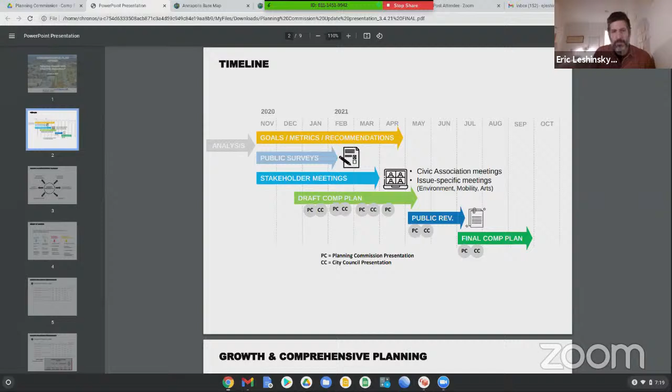But I'm happy with the progress so far. We've met with you all a few times now to talk about our approach to land use. A lot of that is in anticipation of growth — we're trying to be proactive in how we leverage our land in the city.

The growth projection is something that is pretty critical to the comprehensive plan. It is impacting a number of other pieces of the comprehensive plan — just trying to summarize those here. I think one of the most important ones is community facilities. It's obviously a hot topic in the city right now with our adequate public facilities ordinance being updated. We need to make sure that we have the resources to accommodate growth, and thinking about where growth should happen in the city is part of the comprehensive plan, to be sure, and that's something we're going to be expanding on.

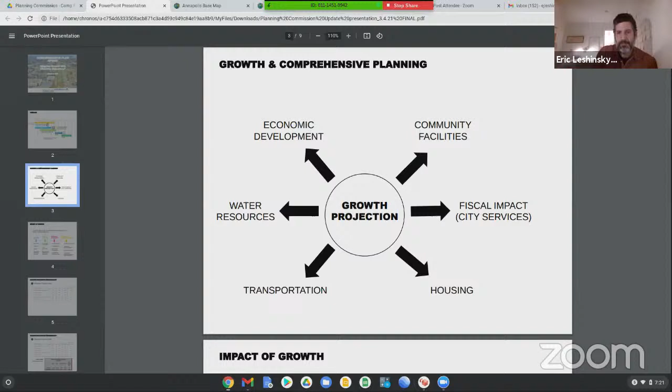There are a number of benefits that we could be anticipating with growth of new households in the city — trying to summarize that briefly. A lot of this should be straightforward, but it's important to recognize that there will be growth; there are developable parcels throughout the city that will change. As a city, with our comprehensive plan, we're trying to be proactive about what kind of growth we'd like to see and what benefits we're looking for. So we're trying to align our growth projection with the vision for the city that we put forward in the comprehensive plan. I'm going to hand things over to Chris Jakubiak in a moment.

Chris, do you want me to stay on this slide, or should I go ahead into the methodology? Let's go to the next slide. I'll just give you a heads up when we can switch. And in deference to the tight schedule, I will move fast, and I guess we can anticipate if you have any questions or comments, you can get back to us.

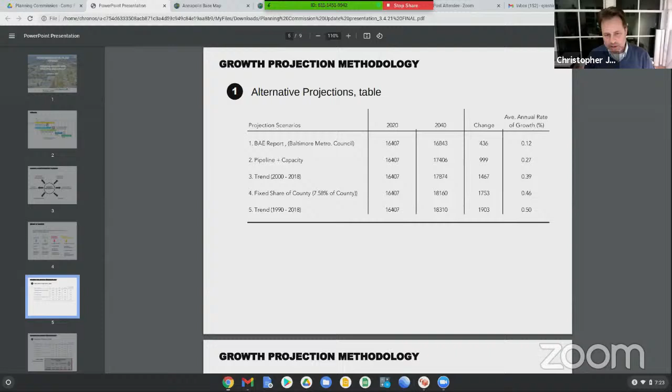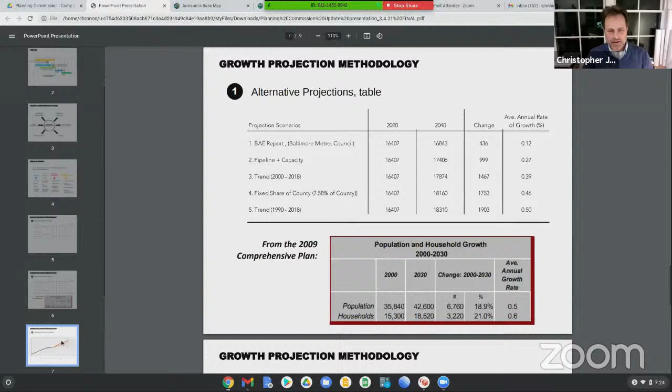Next. And I would just remind folks that the BAE report we're talking about is the fiscal impact analysis that our other consultant BAE produced in the past year, and it was kind of agnostic in thinking about how we want to grow. It used the Baltimore Metropolitan Council's projections, but just basically assumed everything else to stay the same.

Let's see. And this slide, there are a lot of things going on here, but the important thing is to look at what the city's population is relative to the county, because that share analysis, that percentage share, is often the most effective way of predicting the future at a small town or small city, regional kind of projection.

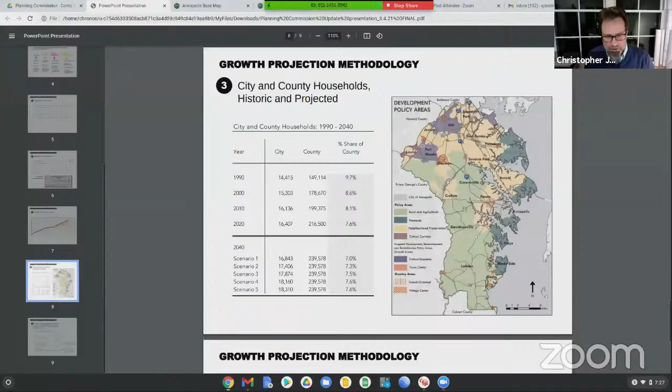So this is probably the most important part of it, because it speaks to the real planning that is happening. So we looked at, there's 5 projections. Now we're going to look at a forecast, and the forecast has more of a normative component. It's kind of what we want, or how we get there, or what's necessary, what steps would fill out that projection? And that's where the planning comes into place.

If you look at the first row here, it shows points A, B, and C. Projects under construction, 417 units. Permits pending, 140. And the remaining infill capacity, that means the other lots that are either not yet developed but could be developed, or platted lots with no houses on them. That takes us to 1,000. I think it's reasonable to expect that points A, B, and C are going to come to pass over the next 20 years.

In fact, 158 of the remaining infill capacity is already well on its way over the past year, and that's the Parole Plaza. So there's a big chunk of it right there off the bat. I think this is a good enough planning number to suggest that we're heading into at least 1,000.

Now we get to the difference between 1,000 and the forecast numbers, which range from 1,500 to 1,700. How do we want to achieve that? One way, thinking as a planning model, is to focus on addressing that affordable housing goal that's in the housing element we've drafted—housing that's primarily for middle income workforce housing. We really think that if the city aims to bring about increases, maybe 500, maybe 600, maybe 700, that's how you match up with the forecast.

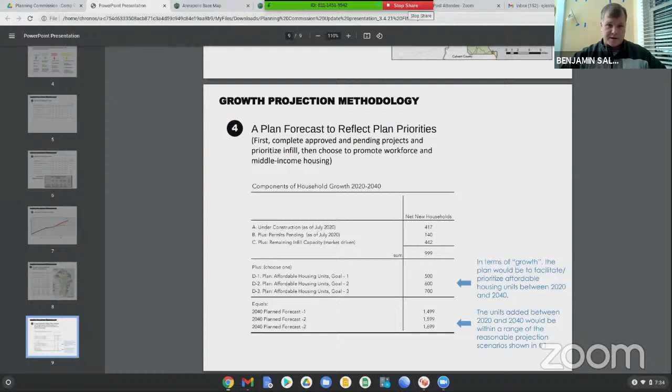Thank you, Diane, and you're crystal clear for what it's worth. And I've also reset myself. And if you go through the app versus going through the web browser, it significantly speeds up the data transfer. That was my issue.

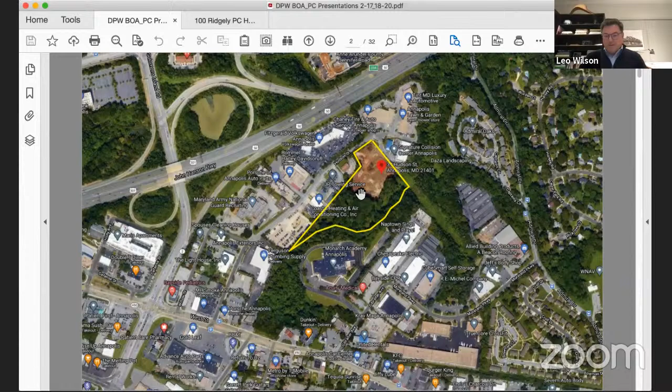I'm going to turn this over now to Terry Schumann to talk a little more about the civil components of it. And then we'll follow up with some commentary from, I believe, our landscape architect. And then finally, I'll talk a bit about the environmental issues and the energy efficiencies associated with the project at the end. And so with that, I'll turn it over to you, Terry. Sure, good evening. My name is Terry Schumann, representing Bay Engineering. I'm glad to be part of the design team on this project.

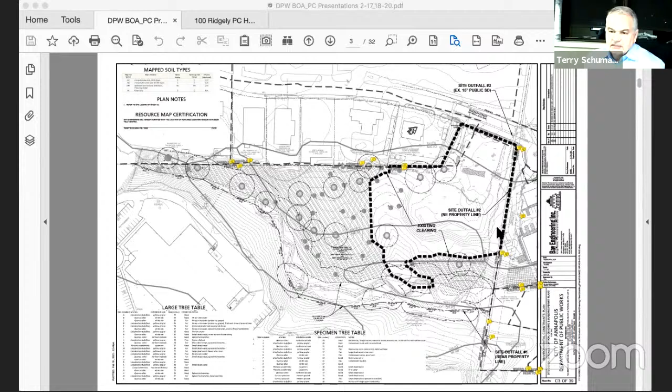Again, our access points will be off of Hudson Street. We have 2 access points, and right off that first access point will be a visitor area for the admin building. We call this building number 1. The front part of that building is an admin building, a 2-story building. The rear of that building will be a repair facility for the fleet and some storage of vehicles. That will access off the rear, with garage doors access, where they wash the vehicles and then do repairs on them.

Just to the west of that, we call building number 2, a 1-story vehicle storage building. Further to the west is the salt barn and the material bins. The surrounding pavement around all that is just for circulation, fleet vehicle parking, and traffic moving in and around the site.

I do want to point out, originally the city had a different layout. We had some meetings with the Environmental Commission and Public Works, and at that point we showed the salt barn basically right where Leo's pointing now. We had the salt barn and material bins there, and there was some concern at those meetings about how close that was to the stream. So as a design team with Public Works, we went back and realigned the layout, and put that material bin as far away as we possibly could, basically to the back end of the site and away from that stream. We think those were good comments, and we have a better plan relocating those areas to the west.

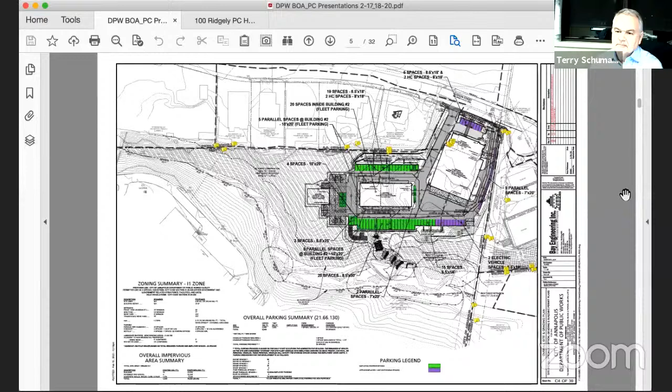The way we're handling the parking out here, everything will be done on site. When a person comes in to start his shift, he'll bring his vehicle, or maybe carpool or take a bus, whatever they're going to do to get to the site. If they bring a vehicle in, they'll park it in the space where the fleet vehicle is parked, take that fleet vehicle out for the day, and replace their vehicle in that parking space. At the end of the shift, they'll come back and replace it. So we will meet all our parking requirements on site, and no parking will be needed off site. Again, we have 112 total parking spaces, and 25 of them will be for the admin building itself. We meet everything on site.

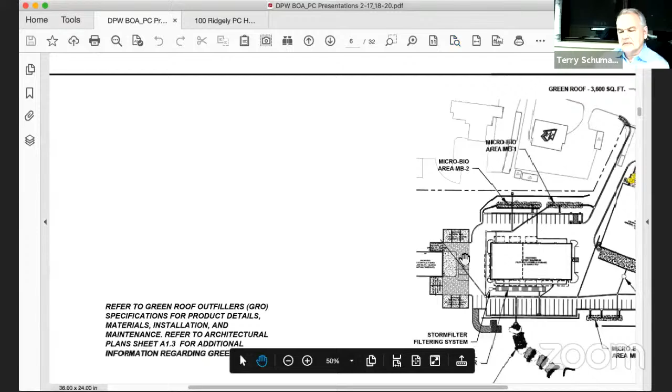Let's go to the next slide. From a stormwater management standpoint, this is just a slide I wanted to present. Maybe Leo, you can blow up that one corner up there. We are new development. Back when Absolute did their plan, that was before the city went to 125% for new development. That grading permit is still active and has been transferred over, and we will continue to use it. But when the city came on board and bought that property, we did redesign these stormwater features, so we're going to meet the 125% that's required in today's code. That's the requirement for the state and the city.

So up in the upper area off of Hudson Street, that's the visitor parking area, we do have a micro-bio area up there. We're also proposing a green roof on top of the admin portion of the building. In the rear of the building, like I said before, that's where they're going to wash the vehicles, what they call the hotspot area.

We're going to propose a Stormceptor, which is the type of treatment that handles heavy industrial areas. It's a hydrodynamic circulation system that settles all the heavy metals and everything else, treating the hotspot area.

In addition, behind building number 2, we have a storm filter that uses carbon filters in a vault, which will also be a hotspot treatment area. We also have some micro-bio areas in and around the perimeter of the site.

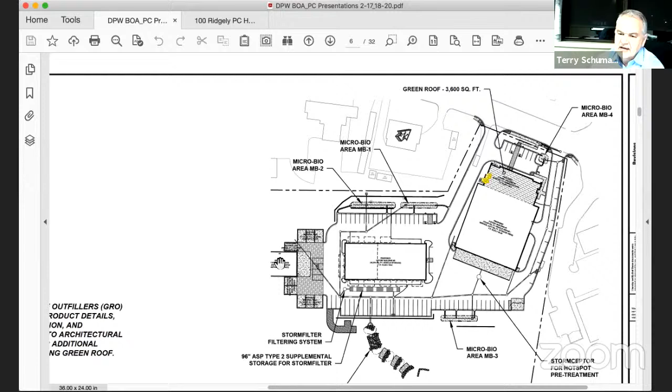Over by the salt barn, I'll get into that in a second, but all this treatment comes down. It's basically a treatment train, with everything flowing down to the south and toward the stream, ending up discharging into the step pool stormwater conveyance system.

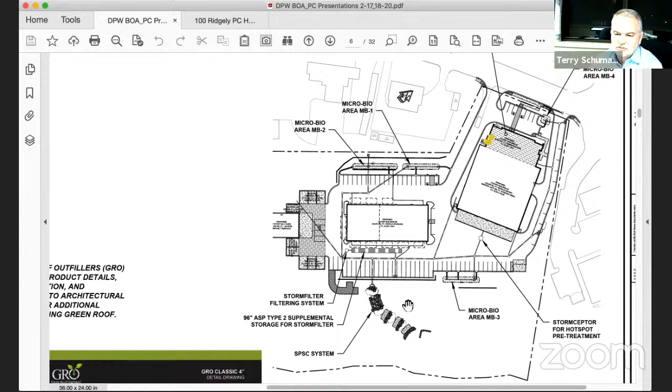It's a step pool made up of stone, sand, special soil, and boulders, and it steps the runoff down, treats it through filtering, and gets it out to the outfall and discharge to the stream. So it's a whole treatment train from top to bottom, treating all the runoff.

Now, from the salt barn standpoint, as I said before, it's been a big concern for many municipalities that do these salt treatment areas. The de-icing salts are soluble in water, so filtering practices are really ineffective at treating them. The best way to prevent the salts from entering the stream is good source control.

So the source control we're proposing on this site: we're going to cover the salt barn, and we'll have a concrete pad placed out front. It'll confine the runoff and confine the spills. We're also going to have a trench drain at the inlet end of the salt barn, and any runoff there will be directed toward a holding tank.

The holding tank can pump it up to a brine system they're proposing with the salt barn. It's a good way to treat that runoff and reuse it in treating the salt inside the barn. It pre-wets it, and they can also use it for anti-icing applications.

In addition, for sweeping, it's a good source control, so the city will use that concrete pad out front for sweeping during dry periods. All of these measures will help prevent salt from getting into the stream. So we think we have a good stormwater management plan, and hopefully you guys can agree.

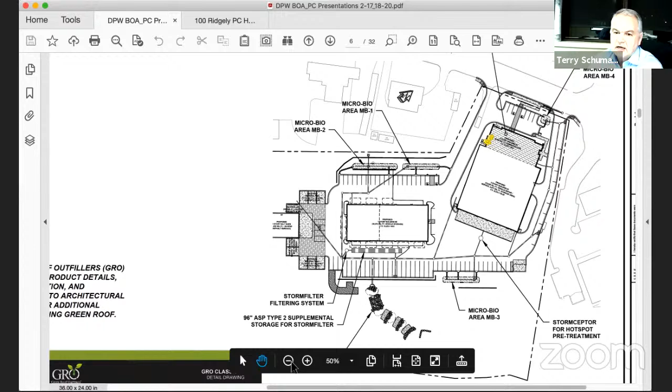Let's go to the next one, Leo.

I think that covers pretty much what we were going to talk about as far as the site and stormwater goes. Leo, you're going to turn it over. I'll turn it back to you, and then you can get Deb. I'm just moving to the next slide here, and I'm going to let Deb Schwab talk a bit about our landscape plan. Thank you.

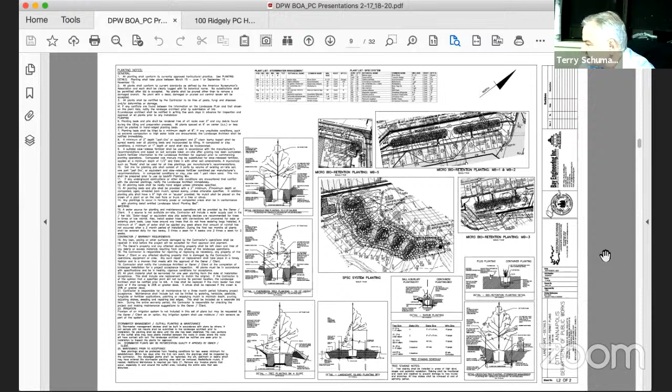So this site is predominantly C and D soils. And honestly, the only logical place to put permeable pavement with the type of vehicles and uses out there would be that visitor parking in the front. And the problem with that area is that's all D soils, and all the borings show there's little to no infiltration out there. So the state regulations don't even allow permeable pavement in D soils.

A is very, very well drained soil, and then B, C, and D. So the classification of soils, A is the best for infiltration, D is the worst. And there's no infiltration up in that area. So we didn't think that was the best place to put it, well, we're really not allowed to put permeable pavement based on the state guidelines.

Got it. And then the last question I have on the environmental issues has to do with the electrification of our fleet. We know that's on the horizon. So is this site set up so that we'll be able to plug in in the future as we turn our fleet from fossil fuel to electric vehicles?

I think I can answer that one for you, Commissioner Butler. What we've done, and we had a meeting about this earlier today, is that we're kind of trying to future-proof the project so that it's not problematic to incorporate that change when and if it comes online. So we have the ability to charge electric vehicles in both buildings with the power supply available to us.

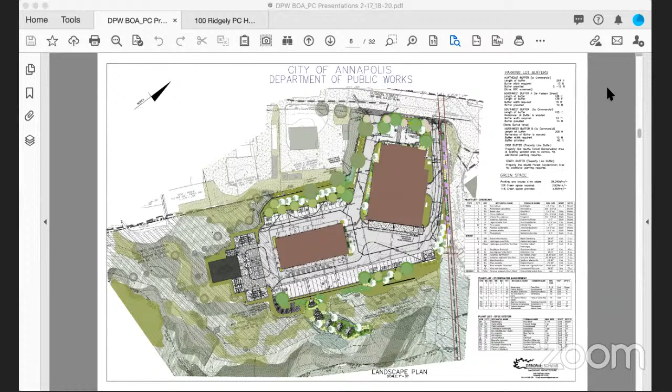Right. Thanks. You're welcome. Well, let's hope — good housekeeping seal of approval. Absolutely.

That's going to be the key. We could say all we want and write into conditions all we want, but it all depends on what happens 10, 15, 20 years from now — whether things are being emptied, cleaned, swept, inspected. It all depends on that because you're right at the headwaters of Weems Creek, which I don't need to remind you.

I hope I'm comforted, but thank you for your explanations to a non-engineer like me. You're welcome, you're welcome. Thank you.

I have a question for Deb Schwab. Deb? Yeah. What kind of maintenance is involved in bioretention areas?

It's similar to regular landscape maintenance, but with the idea that you don't add mulch to it the way you do a normal landscape bed. They just really need to be kept weeded, and kept from having leaves accumulate and fill up the volume you're trying to have in there. That's why we also don't recommend remulching every year, because in bioretention, the mulch just floats up if you put too much in. Other than that, it's pretty much like regular landscape maintenance.

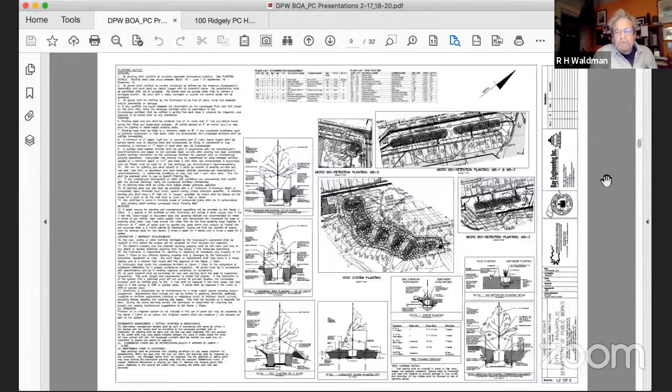Okay, all right. Do you have any idea of... No, that's okay, I'll withdraw the question. I think you answered it about trees and where they're going and how much you're doing. Yeah, well, maybe if Kevin, you're still on the phone, you could go back one more, Leo, maybe.

Yeah, there we go. So the planting that we're proposing is going into the floodplain, which is a priority planting area per the city's code. It's currently not forested, so we're proposing to plant it. That's where our reforestation is going. And there are a few street trees, which we get canopy credit for under the code. So that's how we're planning to meet the requirements.

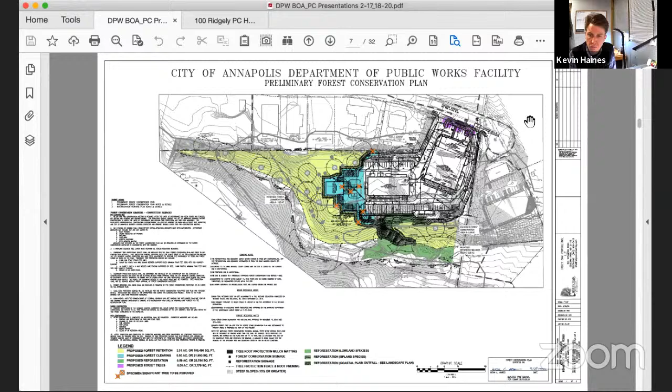Okay, well, okay, thank you. I have no further questions, Mr. Sale. Thank you. I have a few questions that should be rather quick, and I'll make a point before the questions.

It seems like the existing city pre-storm treatment for roads is solid rock salt versus brining, but yet I see brining being done on the county roads or state roads that lead into us. Is that correct, Mr. Johnson? That's correct, Commissioner Sale. And then when we move to this new facility, it's going to give us a brining facility. So should we expect to be moving from a solid rock salt treatment to a pre-storm brining treatment, which is more environmentally friendly? Is that true? That's our plan.

It would not be a total elimination. You would never eliminate the use of solid rock salt, but it would reduce significantly the quantity required to fight a particular storm, and I'm trying to bring this out for the public, the layman, to understand this. So we would pre-storm treat once we have this facility, it would help us pre-storm treat by actually having a brining facility, and then in areas where we weren't able to pre-treat, or we would need rock salt, that would then be spread after ice forms. Is that correct? That's correct.

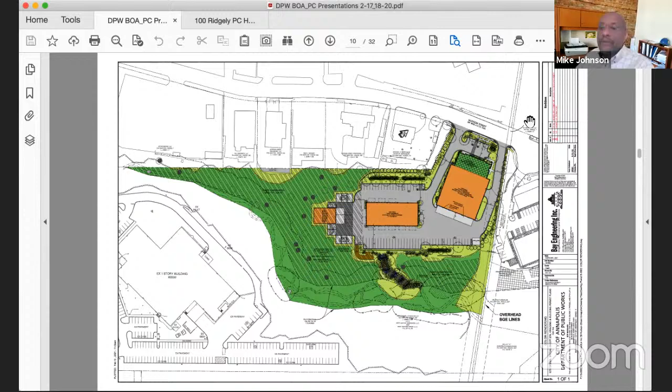Okay, so this facility, I like it. If we could zoom in on the actual salt barn, I'm not going to spend another minute or two on this, just zoom in on the actual salt barn itself. More. Drag that to the center of the screen, please, for everybody. Zoom in again. And what we have there, you have the orange building, a light gray concrete pad, and the dark gray is gravel. All of that leading to stopping any salt from coming out of the salt barn, off the truck wheels, as they go in and out.

Now, the irony of all this is that's a fantastic design, and I like it, to control the salt from going down into the local stream. But then when a storm event happens, aren't we going to take those trucks out and brine our entire parking lots, and also go out on the streets, obviously because we need to, and we're going to start spreading brine and rock salt over the entire city, and when it dissolves, it goes into storm drains right into the bay and everywhere else. Now, that may sound really bad to some people, but it's sodium chloride, NaCl, which is salt, which is already in the bay's lower level.

It's arguable how much the salinity of the bay and surrounding rivers increases due to salt. It would be great if we didn't use any salt at all, but we need it to keep society functioning. We're doing a fantastic job in this design of containing that salt inside the barn and stopping its spread, and also pre-treating our parking lots so they stay functional, capturing any salt runoff. I think that's fantastic. But the irony is those trucks are then going to go out and spread it all around town, because that's what we do for society. So we're fighting over small potatoes here, when if we really wanted to protect the bay, we'd cease work during frozen days. That's just not going to happen. That's my point of interest.

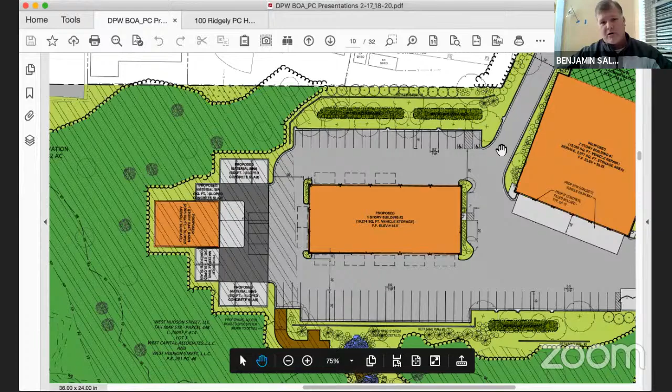My other point while you're zoomed in there: could we get a quick overview of what the pavement type is actually going to be for those parking lots, and also the entrance apron off the main street? Is it all going to be concrete, asphalt, or a mix of both?

It's all proposed to be asphalt.

My limited civil engineering background, a degree and light experience after college, is nothing compared to Mr. Johnson, our new Department of Public Works Director with a master's from Columbia and a PE license. Mr. Johnson, since we have a parking lot that's going to see a lot of slow-turning, very heavy vehicles heavily laden with salt, and since we could be the premier icon of environmentally friendly practices as a city—it seems to me a concrete parking lot may cost more but last twice as long. You'd rather have trucks turning and parking on concrete rather than flexible asphalt pavement. You'd also rather have concrete versus asphalt because you won't have to recoat it and have that asphalt slowly leach into the surrounding environment over time. So, Mr. Johnson, if money is no option here, why wouldn't we choose concrete versus asphalt in this scenario?

Well, I think there are a couple of things to look at. That type of construction is quite expensive, and if we lived in a world where money was no object, I guess maybe we could just say carte blanche that we could do it. But the reality is we have to look at the benefit-cost ratio for different alternatives. A jointed concrete slab has to be constructed to a high tolerance because of the load transfer between the respective slabs and the wheel loads. It would most likely lose in the economic competition over the reasonable economic life of the choice. That's what I'd say without having run the numbers, just based on my experience. It's probably better suited for the interstate system than for a small facility like this, where the scale doesn't allow that alternative to win economically.

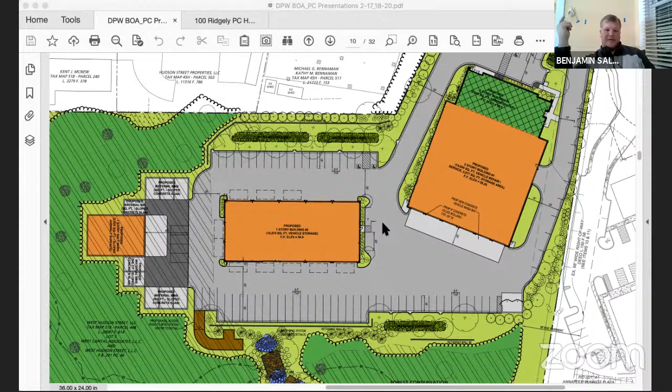But looking at it from a selfish local perspective, I just hate to see all these asphalt parking lots constantly getting recoated, and then 5-6 years later they're recoating them again. It's like, well, where did all that asphalt go that was nice and black? And you look over and it's not the greatest lively trees or grass around that parking lot. Okay, your professional opinion wins over mine, and I yield.

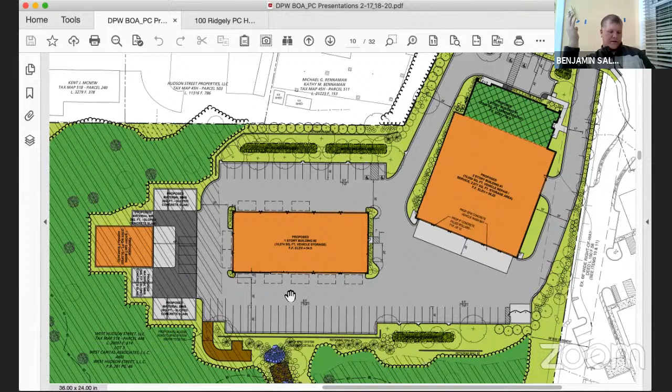So that's my last comment on pavement. The only other future questions I'll have, hopefully you guys can address, are backup systems during emergencies to keep facilities running when there's loss of power in the local grid, and also roof slope for snow loading. That's it, so I'm free to go on. No further questions from me.

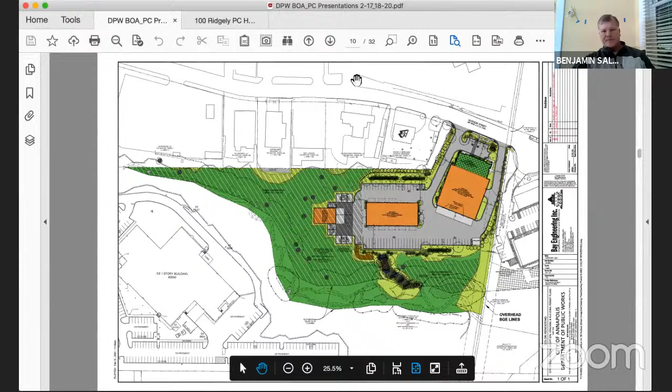Okay, so I'm going to run through the architectural elements of the project and describe what we're up to here, very quickly. You've seen most of this before. We've got a program here which includes building 1, which we've described already, with administrative function and a maintenance shop, which allows the city to bring all of the fleets in at different times to do the necessary maintenance to keep us up and going. So all that occurs in building 1.

In building 2 is vehicle storage, and there's really two components to it. There are areas that are heated, where trucks need to be kept warm at all times so they function properly, and then there's unheated storage. Then there's the salt barn, which we've talked about a little already, and the storage bins for bulk materials the city uses regularly, like gravel and other materials for road repair. The site also included issues related to parking and environmental stormwater management, which we've covered pretty heavily already.

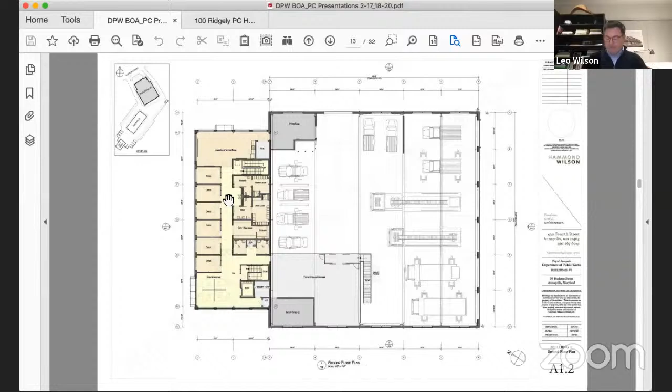As was mentioned earlier, the flat roof portion of the building is set to accommodate a green roof program to help us with our environmental requirements on the site.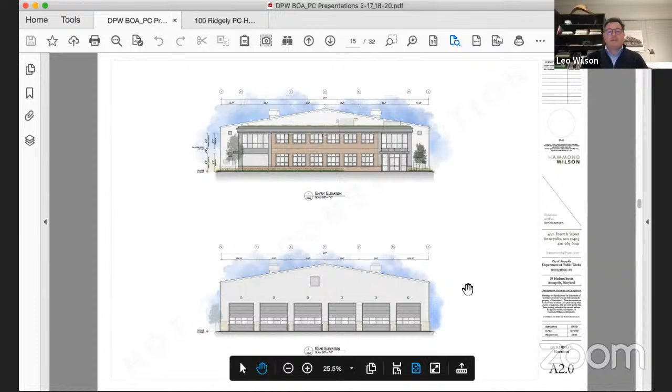Side elevations show how the two blend together. There are a lot of penetrations in the building, which you can see by the marks here. You can see the scale of the front versus the scale of the back. I think it organizes well and should function efficiently for the city. There are windows in the service bays to provide natural lighting, so we don't have to rely as much on illumination from an electric source.

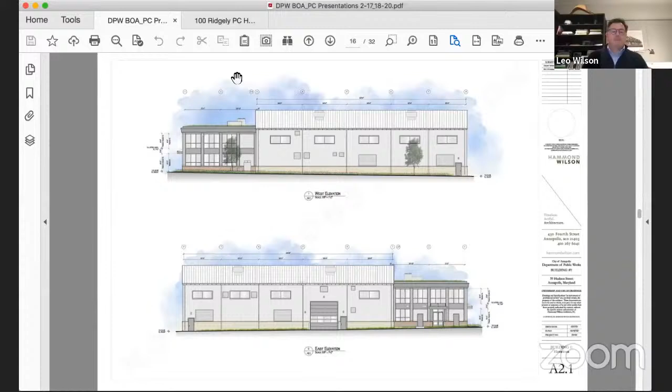Building 2, as I described earlier, really breaks down into two parts: a part that's heated for trucks that need to be kept warm, and a part that's not heated. Access is on the left and right side, or top and bottom if you will, and also at the ends there's space for bays. Again, the idea was to put as much in the smallest volume we could, so it's as efficient as it can be, and you can see how many vehicles are accommodated here. It's quite a few.

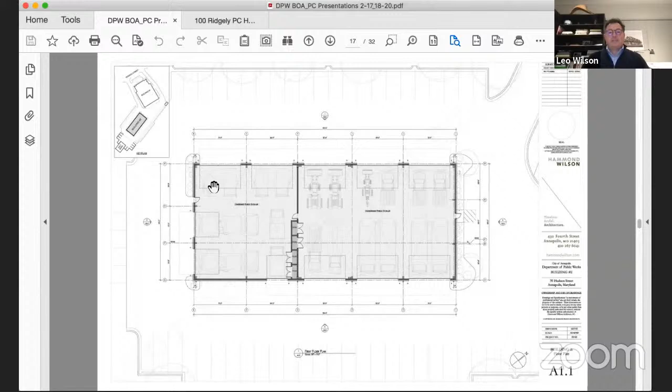Elevations of that second building. This building in its entirety is a pre-engineered metal building structure. Again, highly efficient and cost effective.

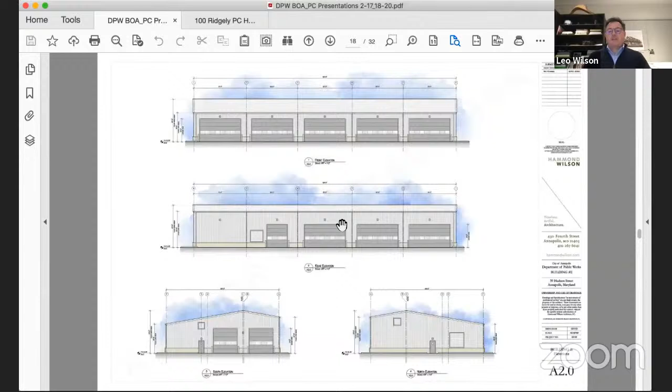The last area is the salt barn area, and here's the salt barn. I'll show you images of that in just a moment, with our bays, our storage bulk areas around the perimeter, and again the drive areas we've talked about already.

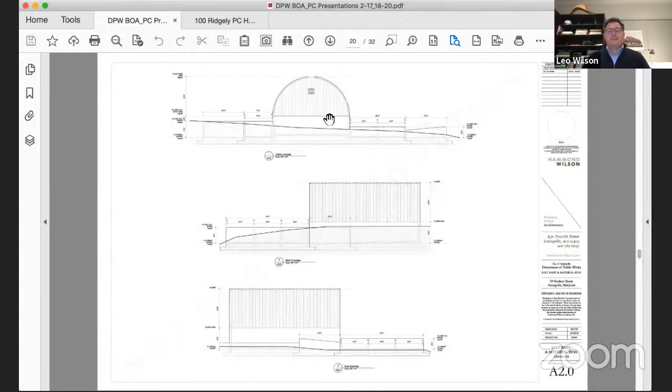Here's some imagery for the salt barn. These are quite a bit different from the old ones we've seen. There are high bin assemblies here that allow us to get the trucks in and out of the facility very easily. Again, this is a good deal bigger than the one we have now, but the ability to bring the trucks inside and not have the loading and unloading happening directly in front of it at all times is helpful.

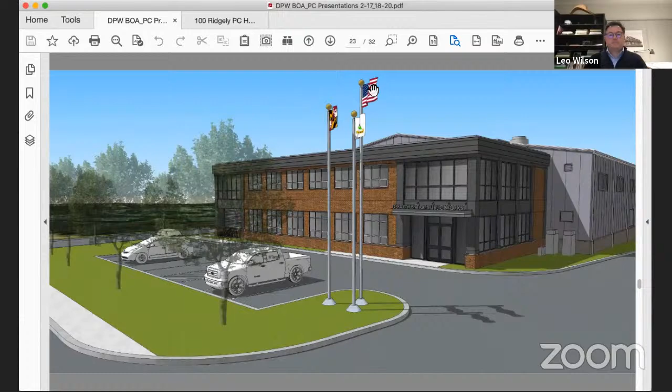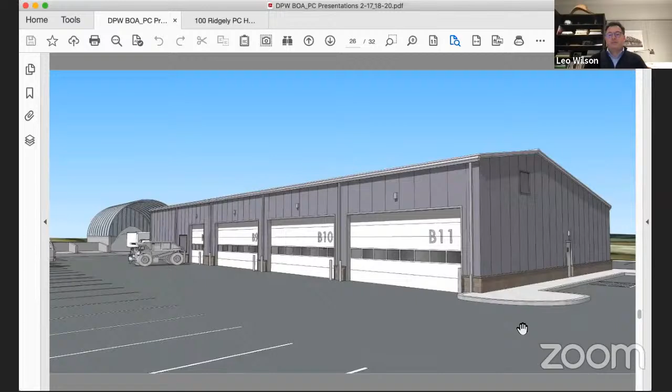A close-up of the front. A couple other images that show you how the buildings are arranged, and how the assemblies in the back will work with the wash area shown here. This is building 2. Again, you can see where the driveway goes around the entire perimeter of the building for efficiency.

Another view where you can see building 1 in the distance, the back of building 1. This is an overview of the entire thing, and here you can see the salt barn in the back, and the scale of that dump truck that goes up against it. So it's really quite large, and I think it's going to do just what it needs to do.

So the last piece I wanted to talk about was the LEED requirement for the project, Leadership in Energy and Environmental Design. One of the city requirements is that all of their buildings achieve a silver certification. It's not the lowest, it's not the highest, it's a mid-level - one step up from the minimum standards to achieve LEED certification.

The process includes evaluating things that are handled on site, like stormwater and lighting, and goes all the way down into the mechanical systems in the building. In order to achieve this certification, you need to meet certain checkpoints along the way in the design, and in the end you have to demonstrate that the systems are above average to a certain measure beyond what the code requires.

So the systems for mechanical are more sophisticated than you would have in an entry-level design. And even the envelope, so the insulation of these buildings, and even where the materials are sourced - they have a certain percentage of that material that has to be recycled or have high recycled content. One thing most people don't know is that steel in the United States is very high in terms of its recycled content, so using that material is a good way to kind of jumpstart that. The steel buildings help a bit.

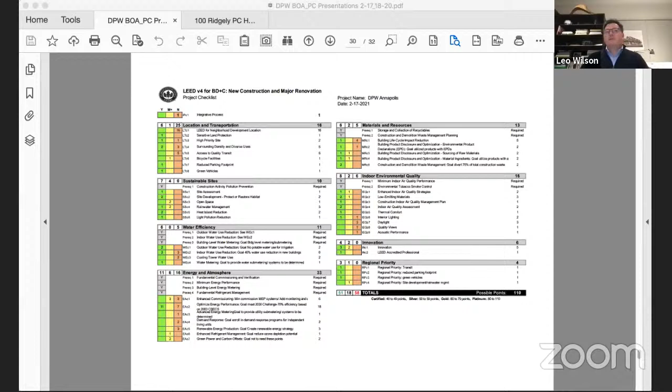Yes, I'm just trying to get my camera. There we go, camera should be turning on here in a second. Can you guys hear me? Yes. Okay, well my camera's not turning on for some reason.

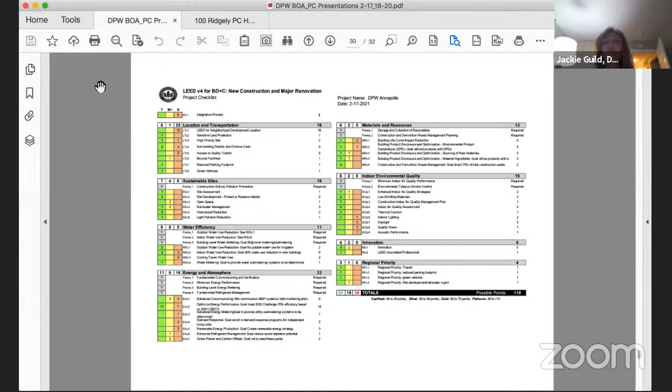So I did review all the proposal, and I had questions for Mike that I raised, along the lines of forest cover and stormwater retention on site, native planting, solar, green roof, LEED, permeable pavers, asphalt versus concrete, and all of those questions were answered to my satisfaction. Some of those were based on a cost-benefit analysis, and others were just meeting everything that I thought was important at this site, especially we're exceeding the Forest Conservation Act requirements to some extent, as Mike mentioned, and this helps us get towards the city's goal of achieving 50% forest canopy cover by 2036, and we're meeting our new 125% new development standards for stormwater retention.

I asked questions about the stormwater conveyance system, if the salt and the brine would be treated before it hit that system. Those questions were answered to my satisfaction, so that we don't have excessive salt going into Weems Creek and impairing Weems Creek any further than it's already done there.

We had hoped that there would be a restoration project going in the near future for Weems Creek by the Severn River Keeper. They put in for grant funding for a feasibility study of the Moreland branch of Weems Creek, but that was not funded. But the city has not given up on that - we're going to partner with the county and the Severn River Keeper on that project. So we were just talking today about getting back into contact with the county and seeing if we can do some studies there and figure out some further restoration of Weems Creek that will be the receiving waters of that step pool conveyance system, the RSC.

We also talked today about future proofing for electric vehicles, which is an initiative that I'm in charge of for the city - electrifying the fleet and providing charging stations, and making sure that all new buildings in the city are future proof for electric vehicles, because that's where we're going. Initially we're starting with passenger vehicles in the fleet, but eventually we will be moving to light duty trucks, and eventually we'll get to heavy duty trucks as the technology improves.

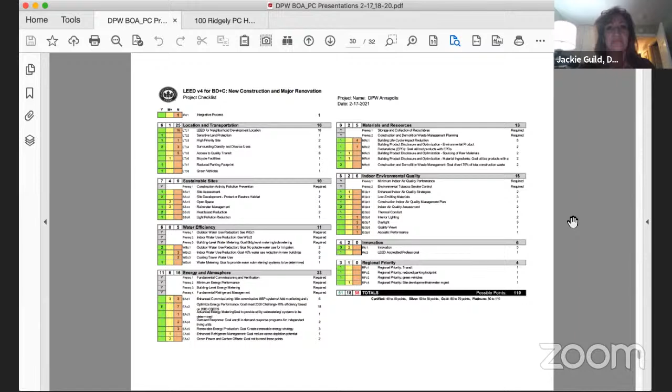So Jackie, thank you. You're welcome. So with that, I think that concludes our presentation, and we're happy to answer questions that have yet to be answered. Okay, thank you very much, Leo. Any commissioners have any questions of the presenters?

No, I would just like to thank everyone again for making some really major modifications that improve this plan. Also, I'm very much looking forward to hearing about your analysis on making the roofs ready for solar panels in the future. And on that note, the roof that's green for the administrative building, what is that surface again?

There is a special process for selecting the plant materials that can be put on these roofs, and the goal is to come up with products or materials that require very little maintenance and care. It's usually a 2-time-a-year event where someone has to go up there and make sure that things are growing as they should. Again, it's part of the LEED requirement that the landscape materials require little to no irrigation, and the roof materials require none. So there'll be a little bit of care in the first year or two to make sure that they're thriving as they should, but once we get past that, these systems essentially just need to be cleaned - some materials might show up through bird droppings that aren't supposed to be there that need to be removed. But beyond that, I think that green roof is really something that sustains itself over time.

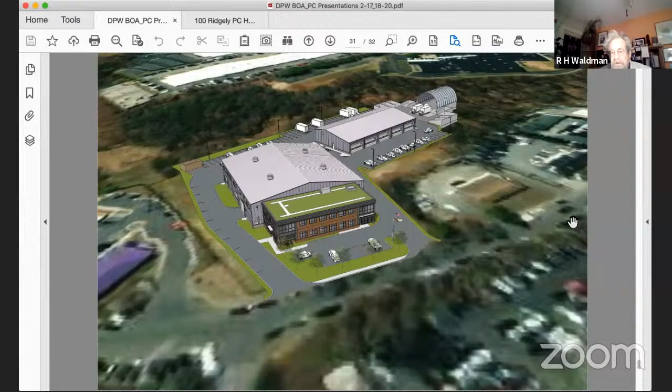Okay, thank you. Any other questions from commissioners? I would like to thank this team for answering the questions that I and the others have posed. It's been quite informative. Thank you.

Okay, hearing nothing from the rest of the commissioners, we will move on to opening the public hearing for this item, which will remain open through to our next meeting. And I have to ask city staff if any new comments regarding the Department of Public Works presentation from the public.

There were 2 public comments that were sent to the commission from some business owners in the Hudson Street area that had concerns with traffic on Hudson Street and parking. But as in the presentation, you see all the parking is handled on site. I also forwarded you a comment letter from the Annapolis Environmental Commission, which I think Ms. Guild answered the environmental concerns. So there was no other public comments.

Kevin, I had one from Ann Stevenson too. Yeah, was Ann that second? Stevenson is on the Environmental Commission, so she forwarded the AEC comments. Okay. I had an email from her as well. Well, she had sent them through the Form Center to both the Board of Appeals and the Planning Commission, and then also sent an email attachment. So we got them all, and I sent them all to you. So they should be combined as one? Yeah, it was one submittal on behalf of the Environmental Commission. Thanks, Kevin.

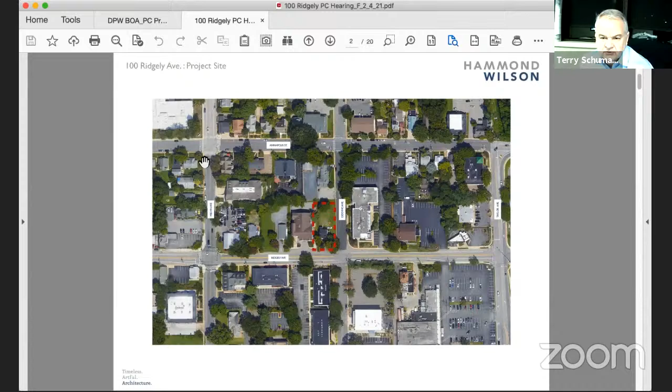Let's go to the next slide. This is just a blow up. You can again see the house, and you can see the direct access off of Ridgely Avenue, and adjacent to it is a medical office building and Giddings Avenue.

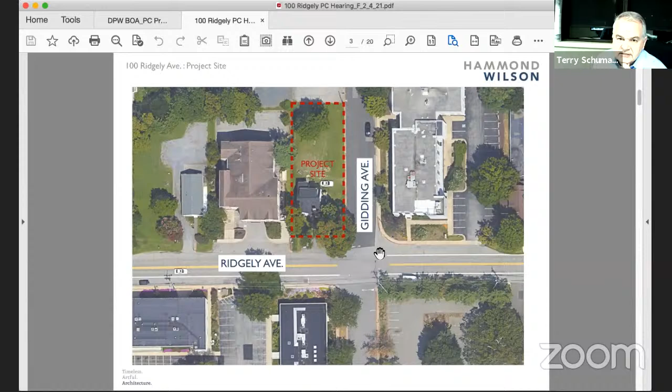That's just a blow up of the site, giving you a little context with the surrounding areas. Let's go to the next slide, please. That's looking from the other side. That's Ridgely Avenue right in front of you, and we're on the other side of Ridgely Avenue looking at the site. So you can see the house and Giddings Avenue on the left side.

Let's go to the next slide. These are just more pictures of the house. The top one's looking up at Giddings, looking up toward Ridgely. The second to the right is directly from the 20 Ridgely site, looking directly at the house, and then another picture looking back toward Annapolis Street.

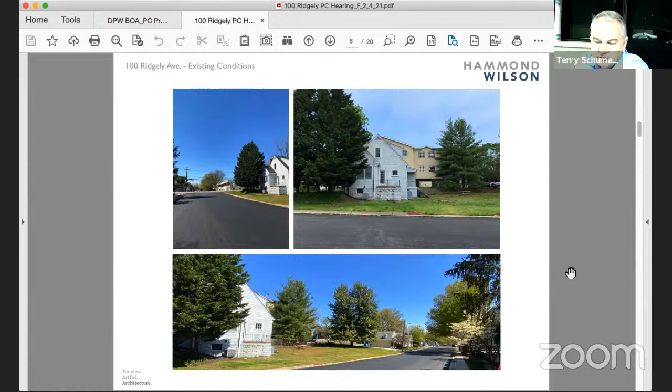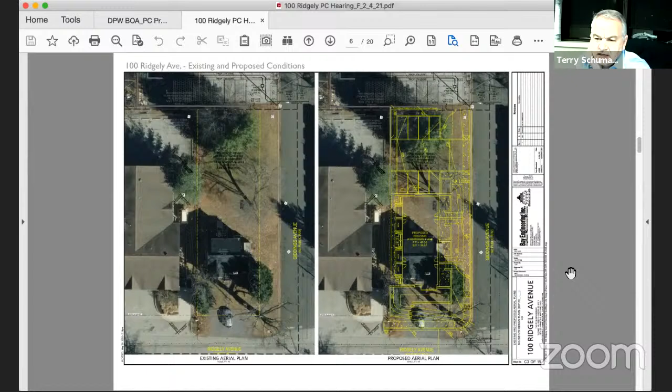Next slide. So this on the left side is just an existing aerial, and on the right side you can see the overlay of our proposed development on top of the existing. I think we'll get into the proposed site plan a little better on the next plan.

Can I ask you just a quick question about where the private and public rights of way are in this diagram? Sure.

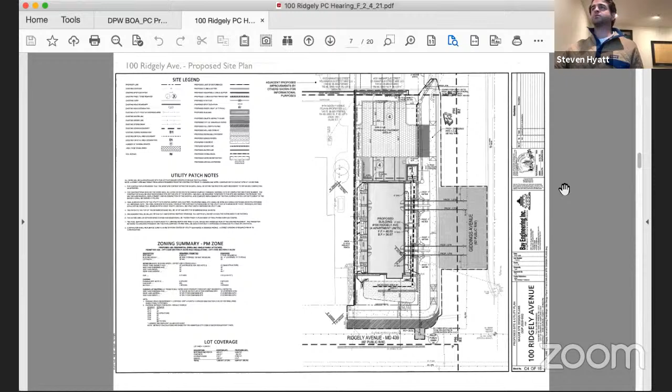Thank you, Terry. I'm going to ask Kevin Campion with Campion Hruby, our landscape architect, to introduce himself and go through his speaking points, please.

My name is Kevin Campion. I'm a partner at Campion Hruby Landscape Architects in Annapolis, 111 Cathedral, Annapolis, Maryland. Happy to be the project landscape architect for this project. It's a pretty straightforward landscape, and I'll try to be brief.

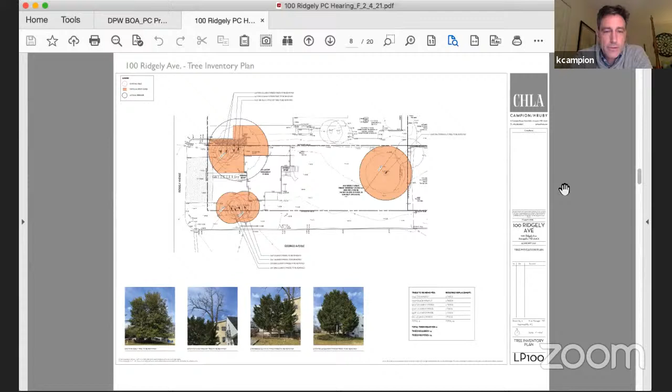We really just tried to establish 3 objectives. Can we go to the next slide? The first objective was to reestablish a street tree cadence on Giddings. Anyone that's been there recently knows that on the south side of Giddings there's a line of really beautiful stately willow oaks, so we are continuing that cadence of willow oaks across the north side with 4-inch caliper trees. On Ridgely, we're also including 2 more willow oaks to create that urban street tree composition. The second objective was to create nice urban terraces and gardens for the 4 units.

Those gardens are in front of the units, and they're almost entirely native plants: Abelia, inkberry, clethra, Rhus aromatica - a lot of native plants that will do really well here. The third objective was to plant the stormwater management area along Ridgely with native plants that make it look like it's not a stormwater management area, and it's a nice natural planting full of natives.

In terms of our mitigation, like we had talked about - I think Stephen talked about it earlier - we were removing 9 trees. We're mitigated. 7 of them are Leyland cypress.

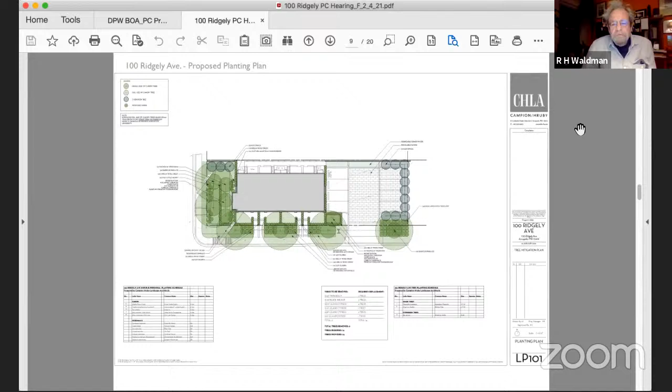We will coordinate this with Tom and Kevin, and we can submit our specifications for approval. I can assure you we will do this properly. All right, we can write that in. This might come up next week, but good. I'm just pointing out my concern. Thanks.

Should we finish the presentation? Go ahead, sir. I wondered if Leo should finish the presentation, then we can answer questions.

Yeah, sure. I was going to ask, just as a point of interest, Kevin Scott, I'm not sure if Brian Adams' letter was admitted as an exhibit, a city exhibit. I didn't send it to the planning commission, but as far as our agency review on it, it is attached in Track It.

To Mr. Waldman's comment about condition number 4 in our recommendation, that's the standard condition about a soils improvement plan, so that point is always addressed.

Okay, can we have the letter submitted to be part of the exhibit, its own exhibit? I would appreciate that, I think it's easily done. Thank you, the letter from Brian Adams, I will send to the commission. Thank you.

Okay, with that, thank you Kevin. I'd like to have our good pal, you know him from his way too much time in front of the Planning Commission, Leo Wilson.

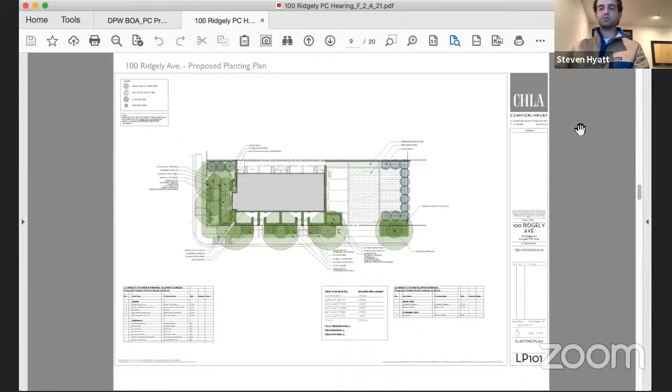Thanks, Stephen. So as the project's been described, it's 4 single-family residences attached. The first floor plan illustrates the location of the buildings relative to the site improvements. We've got our sidewalk out front, planting areas, and raised terraces at different levels to accommodate the slope across the site.

The entrances are on Giddings Avenue, so that's essentially the front of the units. Our parking is down at the end. We've got traditional living spaces on the first floor, small decks out back, and a small walkway that leads to the parking area as well. Off to the side, we have our bioretention area, and it's a pretty straightforward structure.

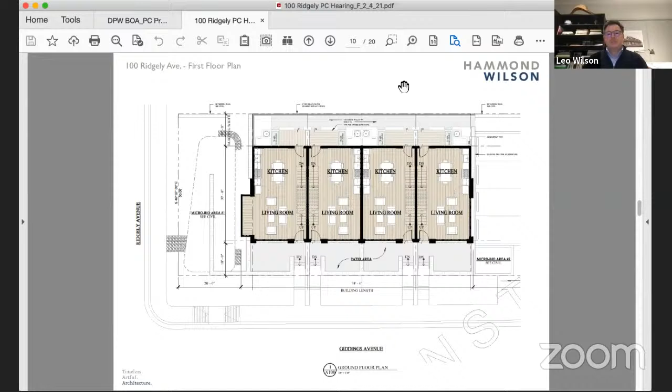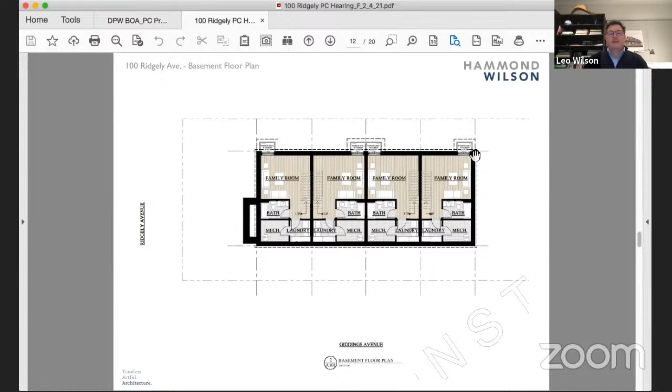The second floor accommodates a 2-bedroom arrangement with a bath. In the basement, we've also decided to provide some living space, mechanical space, and laundry for each of the residences, with a second bathroom. There's also window wells in the rear yards arranged so they won't conflict with the outdoor areas for each unit, providing some light down to those lower levels so they'll be a pleasant place to spend time.

So the rendering - can I ask you a quick question, Leo, in the back there? Yes. The metal awnings, I guess, are those just over the doors, or do they cover the full deck? Just over the doors. Okay, just over the doors. Do they ever think about covering the whole deck to provide a little bit of coverage to keep rain off the deck, keep things from getting really wet, if you wanted to store a bike back there or something like that?

Yeah, we looked at that. We felt it was better because the units are adjacent to each other, and window opportunities exist only on the front and back for some of the units. We felt that anything making it harder for light to penetrate into the depth of the structure was more problematic than helpful. The patios are large enough for umbrellas, and if an awning was a consideration, that's something we could consider, but we really felt getting the light into the unit was the driver for it. Okay.

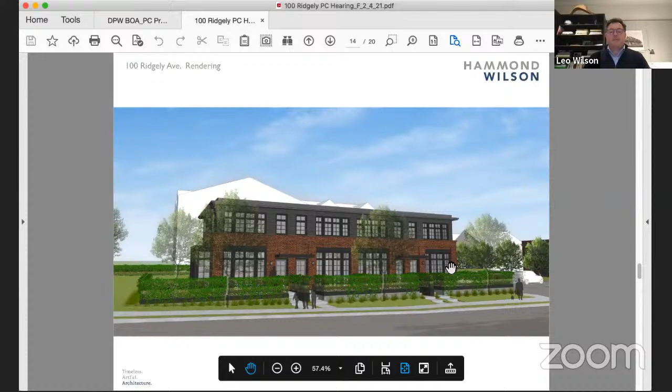We put the other buildings in the area into the renderings to scale so you get a sense of how it works. We think this front area, while it is awful wide, to Commissioner Klein's point, there's a lot of grade that happens here. So you can see that entrances change just a little bit. But that wide area gives us a nice opportunity for plantings, both along the sidewalk and as slight privacy barriers to the terraces, which I think people will be more likely to use these front ones than the back. I think they'll be really pretty places, and it feels nice and open in that area of the city.

Interestingly, in this rendering, you've actually shown a tree lawn. Yes, as I mentioned. But it's not, it's only in your rendering. I mean, if there's room for it, I would advocate for it, or even a wider sidewalk. Five feet is kind of a minimum sidewalk. Six is better. We can certainly consider that. Let's look at the rest of them, then we can talk about all of those things.

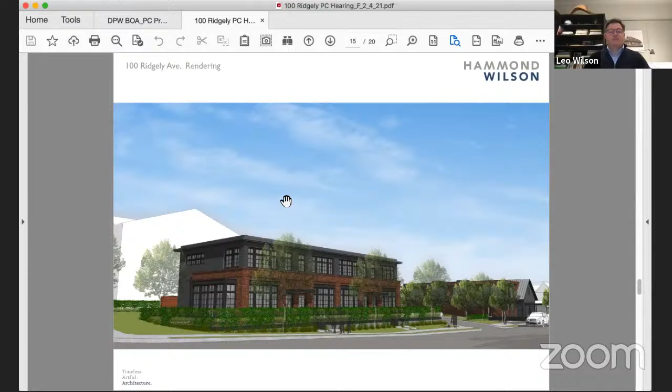So just moving around the building, you start to get a sense of how this thing sits into the context here. We think it works pretty well. It's really kind of a crossroads, if you will, between the architectural styles. It's not the same as Annapolis Street, but it's a different place. It's more of an office building type street. So we think this is going to fit in a little bit better.

Another view from slightly down the road, so you can see how the terraced areas that separate the private sector from the public sector here, I think, works pretty well. It's a comfortable way to separate the uses a little bit and provide a nice outdoor precinct for each one of the owners.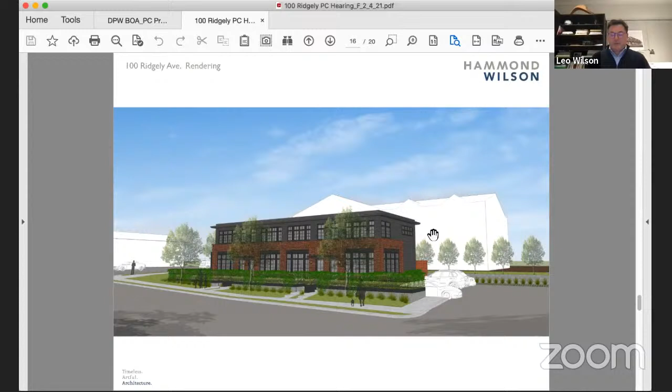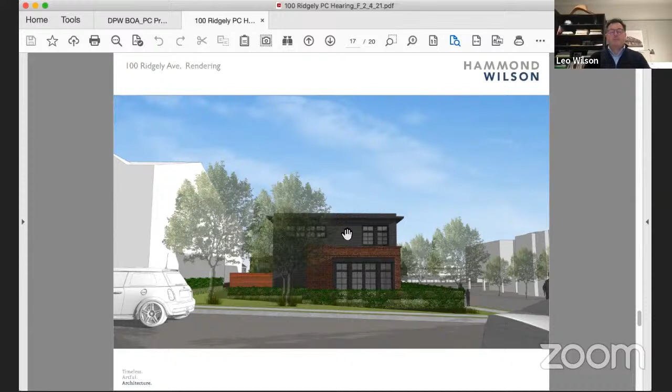This is how it will look from the end here. This is where our bioretention areas happen. This end unit's quite nice, it gets a nice bay window and windows up on the sides at the top. And then we start to use some different materials, like wood walls and maybe a stained wood element here. The masonry components will be brick, a little bit more like a hand-tumbled brick. And then these more contemporary window components bridge the gap between the two different vocabularies.

An aerial view of it as it sits on the corner. Again, you can see just kind of how the building arranges, and of course the parking area that comes off of Giddings here provides the parking spaces required, and there's landscape around the entire perimeter of the building.

So we did these, and then Kevin went back in and tried to illustrate their landscape plan that we have for the property. Mine just show grass because that's what I draw, but Kevin's actually shown what we're intending to plant there. So you can see there's a good deal of ground cover. There's very little lawn here, actually. There's bike racks down at the end.

These are Cor-Ten steel planters, this is our raised bioretention area that takes the runoff from the roof of the building and some of these patio areas. These things tend to do real well with that type of runoff going into them. They're kind of naturally irrigated, if you will. And these ground covers are pretty easy to care for. This looks like liriope to me, but anything along those lines would work well.

Again, here we see more clearly illustrated how the slope on the corners work, taking the driveways off of Ridgely here, which I think is a real nice thing to do. The slower traffic is certainly off of Giddings. What we're able to do with this is provide a really big landscape area for this bioretention.

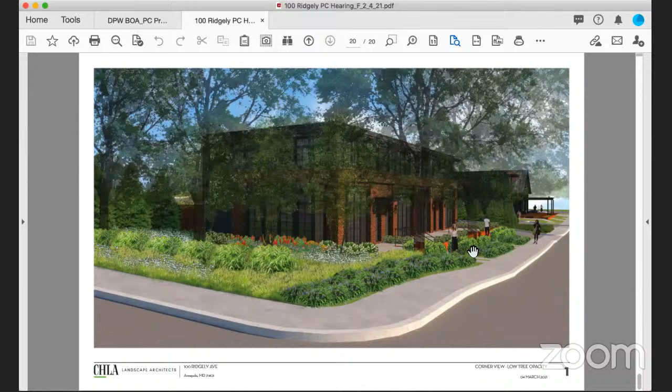And the last question I had was along the lines of what Alex was talking about. It shows in some of the artist renderings basically a tree lawn, but in the plans it looks like street trees. Can you clarify where the trees are?

This is the accurate depiction here. When I do mine, I'm just trying to get the building figured out and set it on the site, so we took some liberties. That's why we included these at the end, because these are the clearest depiction of what we see happening with the site. Great, thank you.

What age are these trees as illustrated? These are illustrated not at a particular age, but shown as mature. So mature is 15 years and older? Well, these are probably 30 or 40-year-old trees, kind of depicting the mature look of this landscape. We didn't try to depict a certain age, just tried to show what a mature planting might look like. A mature willow oak is about 35 to 40 years.

And they live a long time. As you see in Annapolis, they're definitely trees that can live over 100 years. But they're slated to go in at 4 inches at this point, so that they'll go in at about 12 feet tall. These are not small trees.

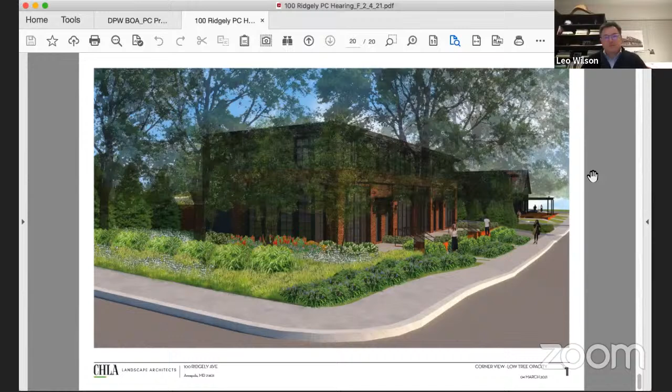And what's the height of the building, Leo? That's a great question. Let me go back to my section and see if I can tell you. I think I'm probably about 24 feet, give or take. So it'll be within 10 years that these things leaf out and begin to look like real trees.

But I'm trying to visualize into the future. Not always easy. It's a bit of a trick. We do these renderings to try and illustrate what we're trying to achieve here. It's always easy to get caught up in what the first swipe of these things looks like. They get planted and they have to grow.

But we're going with 4-inch trees here. My building, actually Andrew just texted me, is actually 20 feet tall. So if these trees are going in at 12 feet, I think it'll be a really nice blend in terms of its first appearance. And the ground cover and most of the planting that's low will be fully developed and right like this in as little as 3 or 4 years.

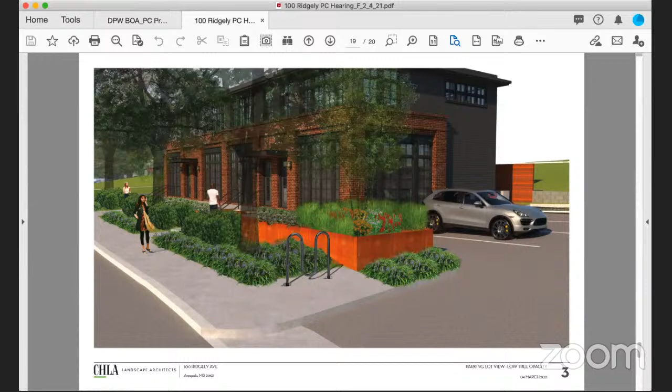But I guess my answer or my question, Leo, is, and I don't know if you can answer it or not, but if the parking requirements weren't so strict here, would you be able to do more units, say 7 units instead of 4?

Well, sure, if I didn't have to park these cars, I could do a bigger building and put more people in the same amount of space, but I've got to. Well Leo, that's not entirely correct because we are limited based on our zoning district here, and that would be a multifamily project, and I don't believe multifamily was permitted in the PM district here.

I don't think we had enough square footage, if I recall correctly. I guess I was just speaking to some of the encumbrances we go up against developing projects like this. Your point's well taken too, the underlying zoning has limitations on how many you can put here, but parking is part of that too. When I heard the presentation of the comp plan, what I was hearing is that there's demand for residential units in the city of Annapolis.

You've seen me here many times, and it's a struggle to get anything of considerable size to go. How many parking spaces here again? Eight, two per unit.

Is there a storage space area for people to have their leisure items? A basement, each unit has a basement. And a green space area to walk your dog? From the neighborhood? No. Anybody else? The park that we hope the master plan will find, that the city can't fund.

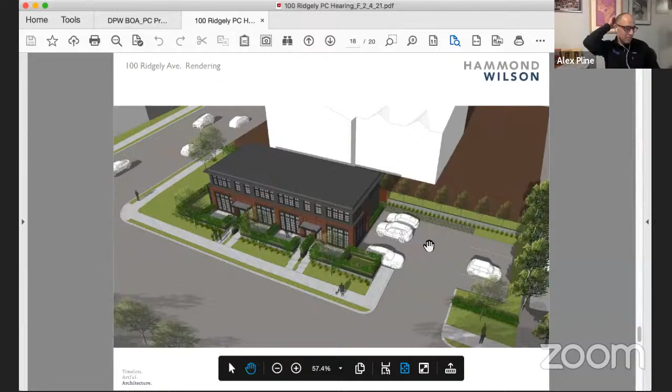You put more people in a small area that will have to go find somewhere they can't really hang out, and there's no frontal hangout area like a porch to say hey to the public. It's more in the rear. No, there is, I'm sorry, there is, the 10-foot patio is nice. Yeah, there you go, that's fantastic, I got to hand it to you, that's really nice.

I'm going to jump on what Alex said. I like biking, I think biking's great, I've got a couple bikes behind me actually, but it would be nice, you're only a couple blocks from the water too, so you might want to think about a kayak rack if you can. Yeah, I think the wall along the back, the retaining wall, is a nice opportunity for a rack assembly for whatever tenant decides that's important to them.

Okay, as long as we're thinking of the future, you might think about more than just one electric charging station. Yeah, I think that's a good point. I have to talk to my project architects and see where we are with our lead services, and pull the conduit like you did on Hudson Street. Yeah, certainly could.

I was about to say we need some more millennials on the commission to bring up millennial items, but Mr. Bob Waldman, our eldest senior member, just brought up that millennial item. Pretty much people who move in here are going to have chargeable cars, and bikes for that matter.